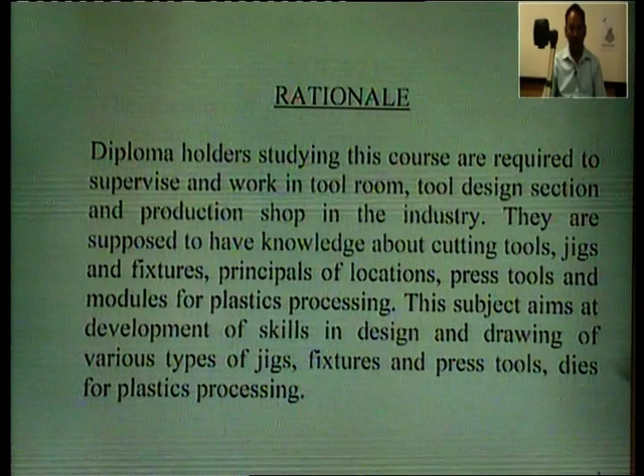Next topic is locating. So what is locating? The question of properly locating, supporting and clamping the work is important since the overall accuracy is dependent primarily on the accuracy with which the workpiece is consistently located within the jigs or fixture. There must be no movement of the work during the machining. Locating refers to the establishment of a proper relationship between the workpiece and the jigs or fixture.

The function of clamping is to exert a force to press the workpiece against the locating surfaces and hold it there against the action of cutting forces.

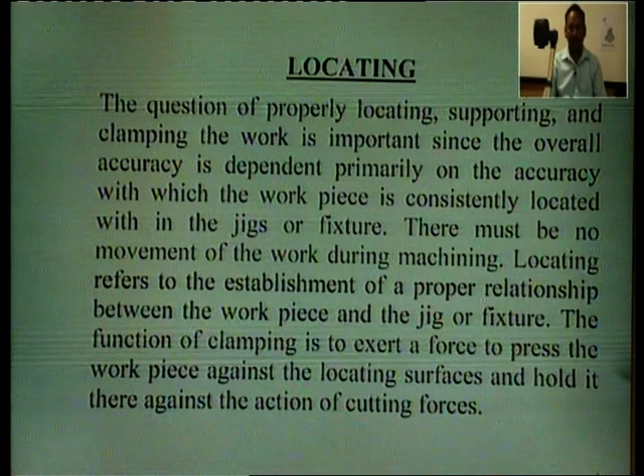Basic principles of location. Locating and clamping are critical functions of any work holder. To perform properly, work holders must accurately and consistently position the workpiece relative to the cutting tools, part after part. To accomplish this, the locators must ensure that the workpiece is properly referenced and the process is repeatable.

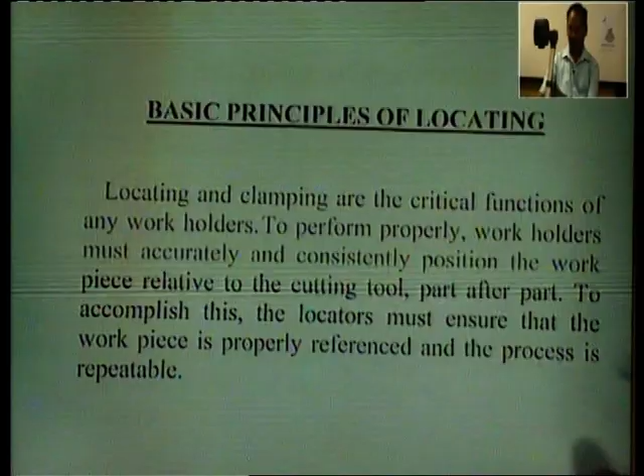Referencing and repeatability. Referencing is a dual process of positioning the workpiece relative to the work holders and the work holder relative to the cutting tools. Referencing the work holder to the cutting tool is performed by the guiding or setting devices. With drill jigs, referencing is accomplished using drill bushings. With fixtures, referencing is accomplished by using fixture keys, feeler gauges and or probes.

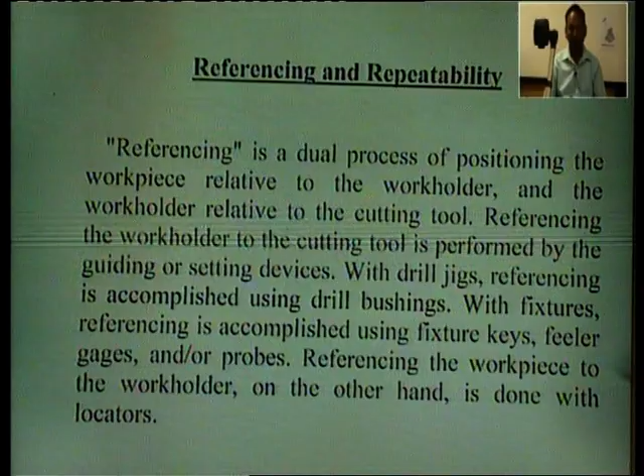Referencing the workpiece to the work holder, on the other hand, is done with the locators. If a part is incorrectly placed in a work holder, the proper location of the workpiece is not achieved and the part will be machined incorrectly.

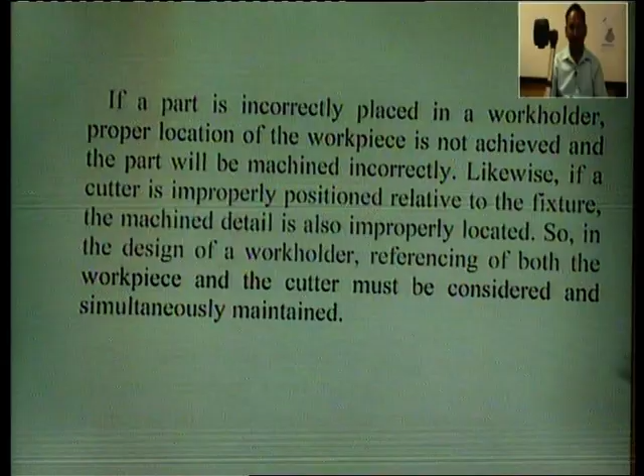To avoid this, likewise, if a cutter is improperly positioned relative to the fixture, the machined detail is also improperly located. So in the design of a work holder, referencing of both the workpiece and the cutter must be considered and simultaneously maintained.

Repeatability is the ability of a work holder to consistently produce parts within tolerance limits, and is directly related to the referencing capability of the tool. The referencing of the cutter must be consistent if the jigs or fixture is to maintain desired repeatability.

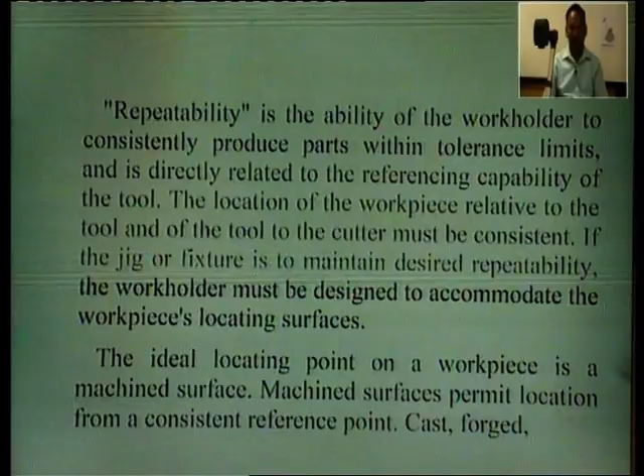The work holder must be designed to accommodate the workpiece locating surfaces. The ideal locating points on a workpiece is a machined surface. A machined surface permits location from a consistent reference point. For example, cast, forged, sheared or sawed surfaces can vary greatly from part to part and will affect the accuracy of the location.

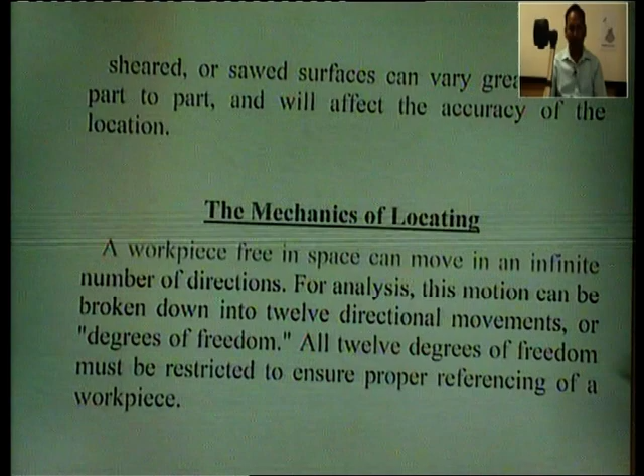The mechanics of locating: a workpiece free in space can move in an infinite number of directions. For analysis, this motion can be broken down into 12 directional movements, or we can say 12 degrees of freedom. All 12 degrees of freedom must be restricted to ensure proper referencing of a workpiece.

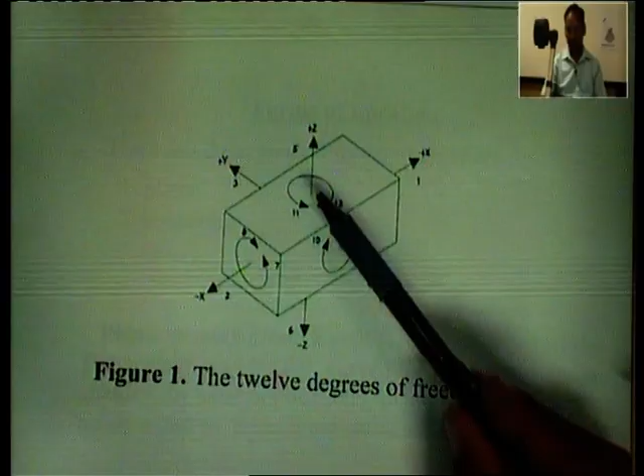The axial degrees of freedom permit straight line movement in both directions along the 3 principal axes shown as x, y and z. Here we can show this is the x axis, this is the y axis and this is the z axis. The radial degrees of freedom permit rotational movements along x, y and z axis in both clockwise and counterclockwise radial directions around the same 3 axes.

The devices that restrict a workpiece movement are the locators. The locators must be strong enough to maintain the position of the workpiece and to resist the cutting forces. This fact also points out a crucial element in work holder design, that is, locators, not clamps, must hold the workpiece against the cutting forces.

Locators provide a positive stop for the workpiece placed against the stop. The workpiece cannot move. Clamps, on the other hand, rely only upon the friction between the clamp and the clamped surface to hold the workpiece. Sufficient forces could move the workpiece. Clamps are only intended to hold the workpiece against the locators.

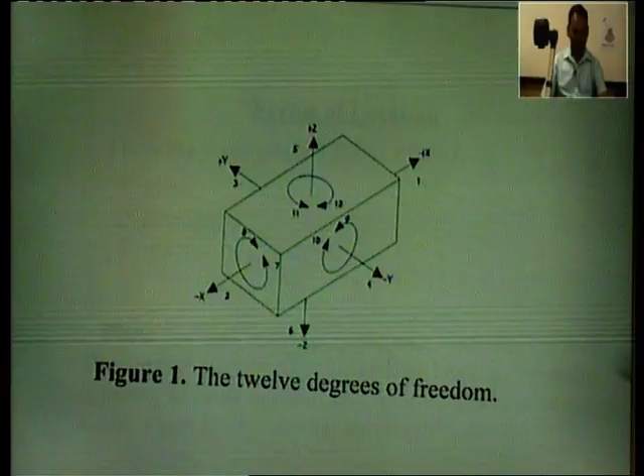Forms of locations. There are generally 3 forms of locations. Number 1 is plane, number 2 is concentric and number 3 is radial. Plane locators locate a workpiece from any surface. The surface may be flat, curved or have an irregular contour. In most applications, plane locating devices locate a part by its external surface.

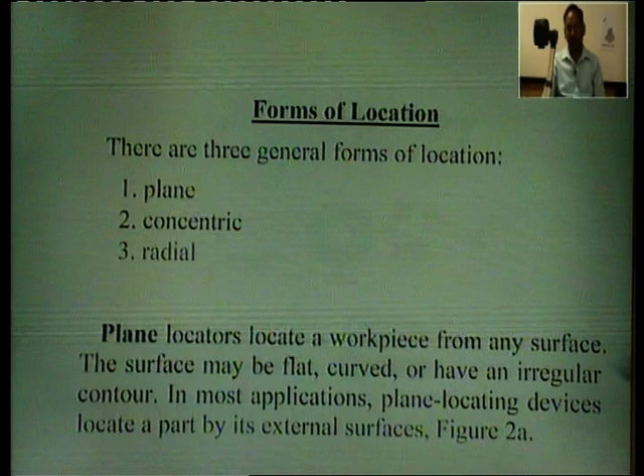For example, as we see in figure 2a, this shows the plane locator. Similarly, figure 2b shows the concentric locator. For the most part, this locates a workpiece from a central axis. This axis may or may not be in the center of the workpiece.

The most common type of concentric location is a locating pin placed in a hole. Here we can see this is a locating pin placed in a hole. Some workpieces, however, might have a cylindrical projection that requires a locating hole in the fixture. As shown in figure 2b, the third type of location is the radial location, shown in figure 2c. These radial locators restrict the movement of a workpiece around a concentric locator.

In many cases, locating is performed by a combination of the three locational methods. Locating from external surfaces: flat surfaces are common workpiece features used for location. Locating from a flat surface is a form of plane location. Supports are the principal devices used for this location. The three major forms of supports are solid, adjustable and equalizing, as shown in the next figure.

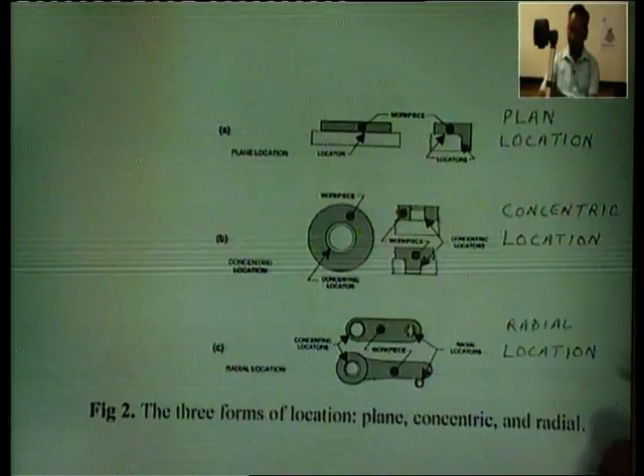So here in this figure we can see that solid, adjustable and equalizing supports locate a workpiece from a flat surface. In the solid case, solid supports are fixed height locators. They precisely locate a surface in one axis. Though solid supports may be machined directly into a tool body, a more economical method is using installed supports such as rest buttons.

Similarly, the adjustable supports are variable height locators. In this figure we can see the adjustable supports given in this diagram. Like solid supports, they also precisely locate a surface in one axis. These supports are used where workpiece variations require adjustable supports to suit different heights, mainly for cast or forged workpieces that have uneven or irregular mounting surfaces.

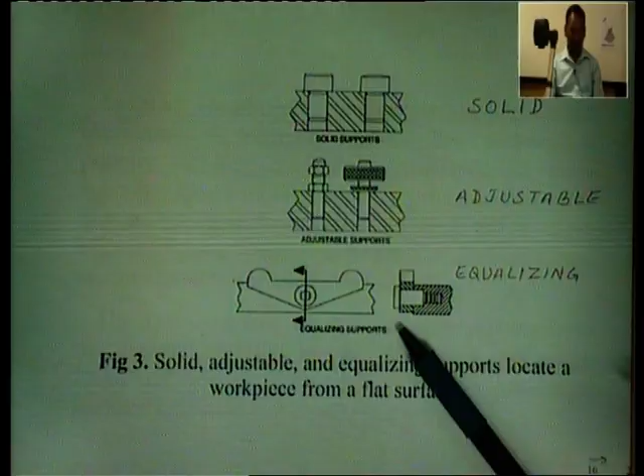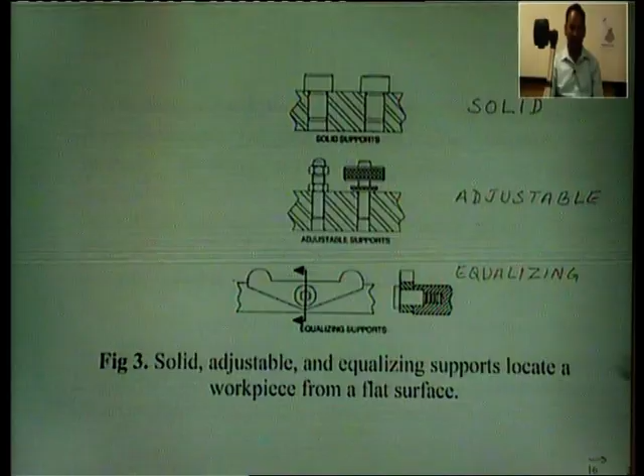Similarly, in equalizing supports, this figure shows the equalizing support. These are a form of adjustable supports used when a compensating support is required. Although these supports can be fixed or positioned, in most cases equalizing supports float to accommodate workpiece variations. As one side of the equalizing support is depressed, the other side raises the same amount to maintain part contact. In most cases, adjustable and equalizing supports are used along with the solid supports as shown in the top figures.

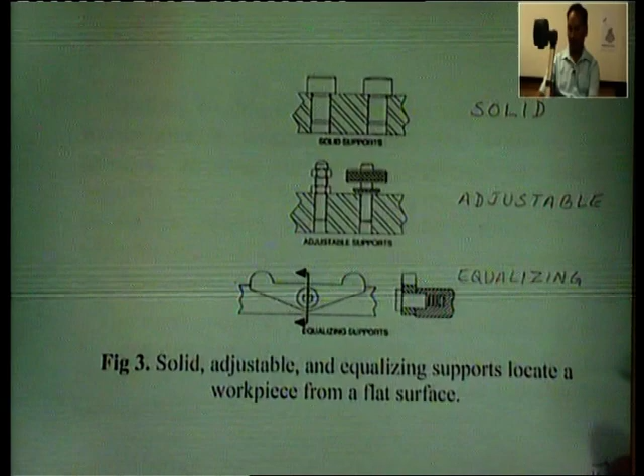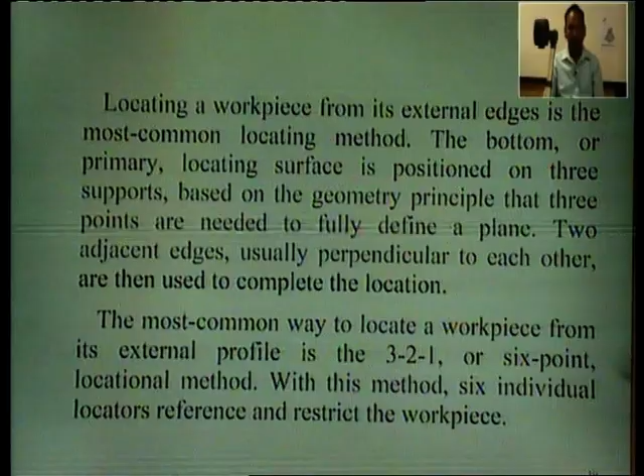Locating a workpiece from its external edge is the most common locating method. The bottom or primary locating surface is positioned on three supports based on the geometrical principle that 3 points are needed to fully define a plane. Two adjacent edges, usually perpendicular to each other, are then used to complete the location. The most common way to locate a workpiece from its external profile is the 3-2-1 or 6-point location method. With this method, 6 individual locators reference and restrict the workpiece.

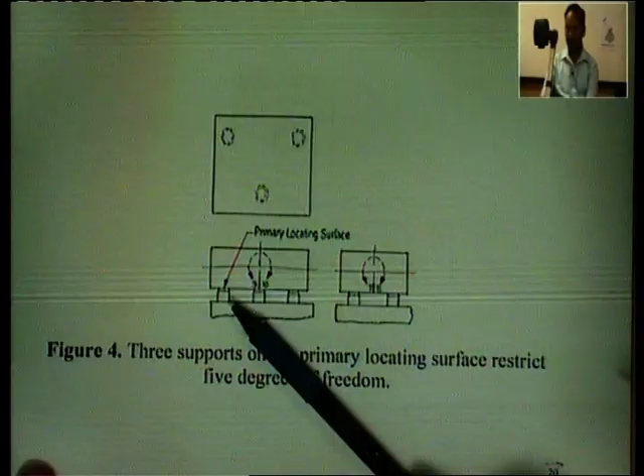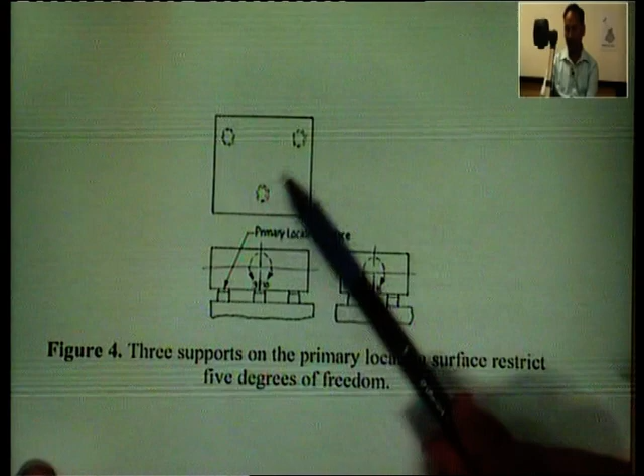In this figure, 3 supports on the primary locating surface restrict 5 degrees of freedom. Here we can see the primary locating surface and the 3 spots given, shown in the top view of this figure. So how can we restrict the 5 degrees of freedom?

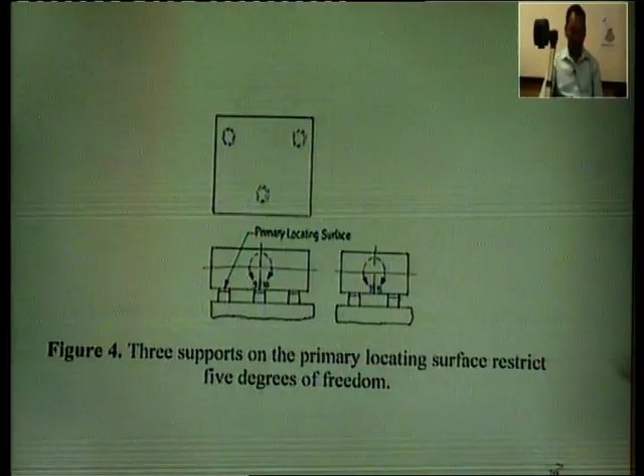As shown in this figure, 3 locators or spots are placed under the workpiece, usually positioned on the primary locating surface. This restricts axial movement downward along the z axis, that is location 6, and radially about the x axis, locations 7 and 8, and about the y axis, locations 9 and 10. Together the 3 locators restrict 5 degrees of freedom.

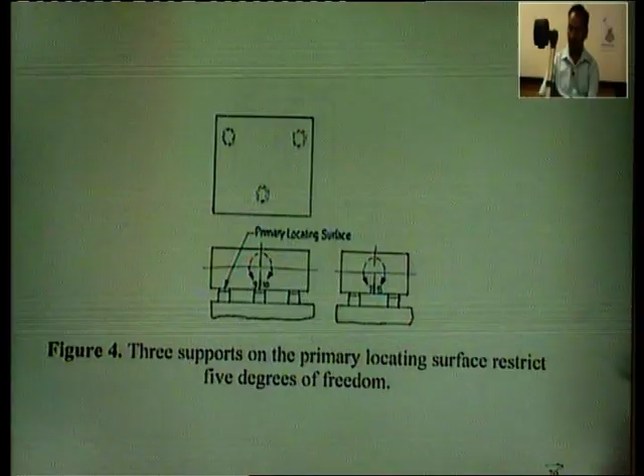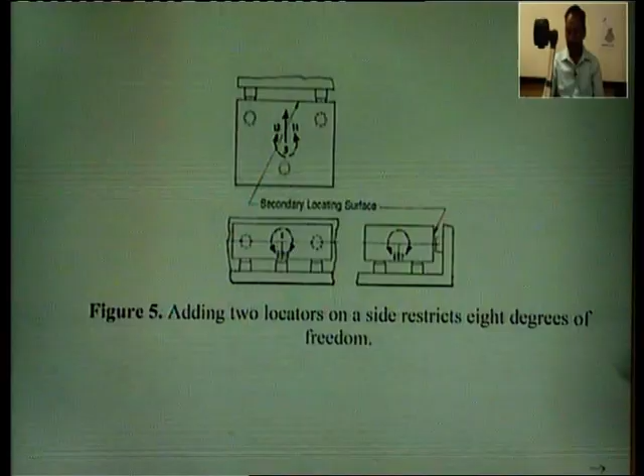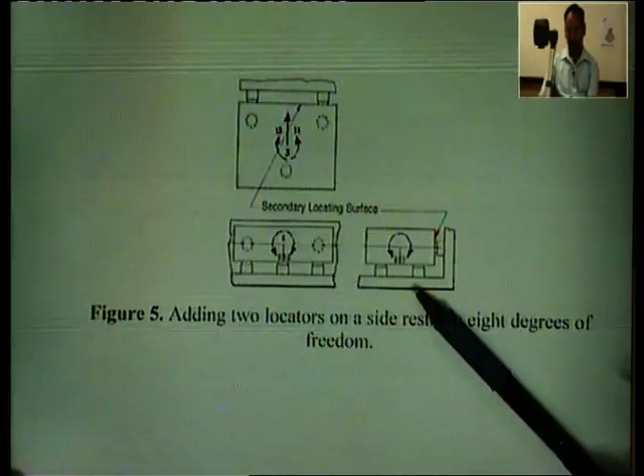Here, by adding 2 more locators on a side, we restrict a total of 8 degrees of freedom. These additional 2 locators are placed along with the already existing 3 locators, normally on the secondary locating surfaces as shown in this figure. They restrict an additional 3 degrees of freedom by arresting axial movement along the plus y axis and radial movement about the z axis. These two are movements 11 and 12.

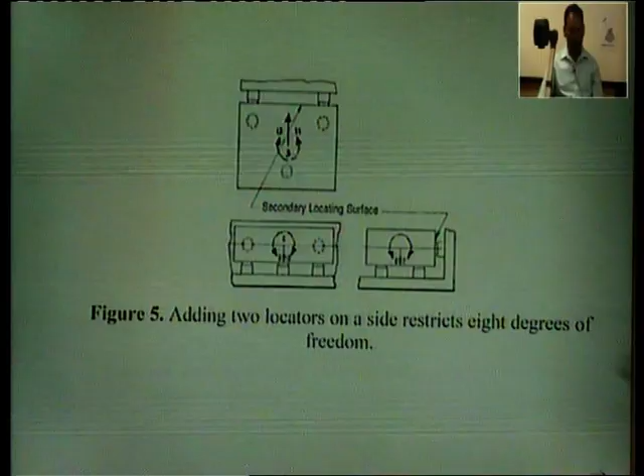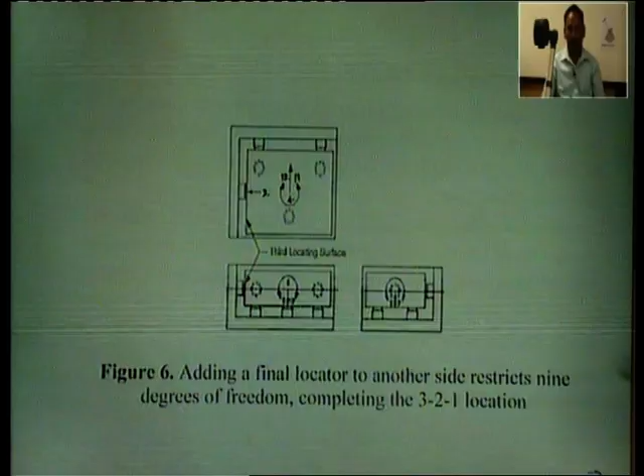Similarly, in this figure, adding a final locator to another side restricts 9 degrees of freedom, completing the 3-2-1 location process. These are the 3 locators already placed inside the workpiece, these are the 2 locators placed on the side, and this is the additional locator placed which completes this 3-2-1 location process.

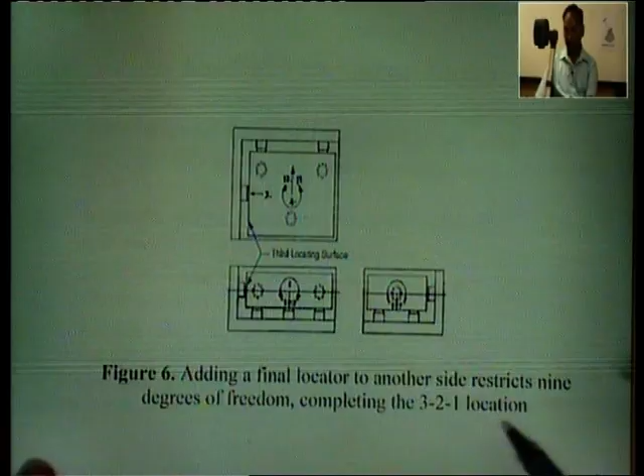The final locator, as shown in this figure, is positioned at the end of the part. It restricts axial movement in one direction along the minus x axis. Together, these 6 locators restrict a total of 9 degrees of freedom. The remaining 3 degrees of freedom, numbers 1, 4 and 5, will be restricted by the clamps.

Although cylindrical rest buttons are the most common way of locating a workpiece from its external profile, there are also other devices used for this purpose. These devices include flat-sided locators, V locators, nest locators and adjustable locators.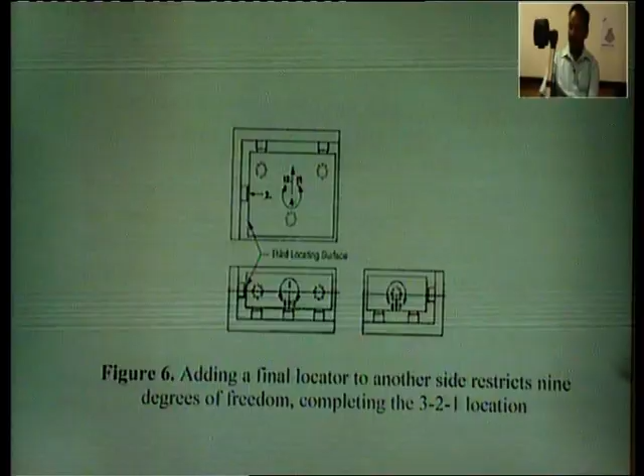Locating from internal surfaces: locating a workpiece from an internal diameter is the most efficient form of location. The primary features used for this form of location are individual holes or hole patterns. Depending on the placement of the locators, either concentric, radial, or both concentric and radial locations are accomplished when locating an internal diameter. Plane location is also provided by the plate used to mount the locators. The two forms of locators used for internal locations are locating pins and locating plugs. The only difference between these locators is their size - locating pins are used for smaller holes and locating plugs are used for larger holes.

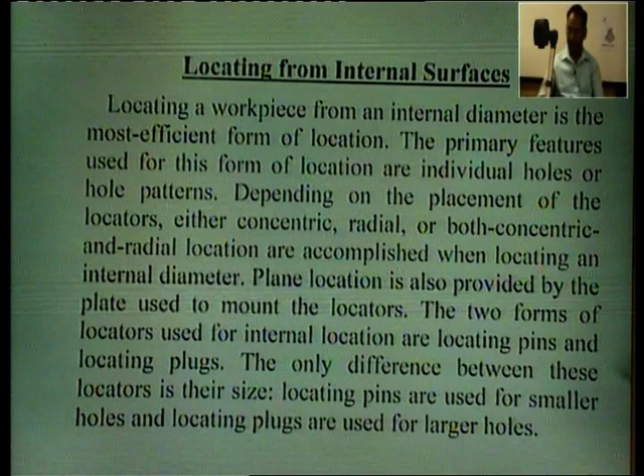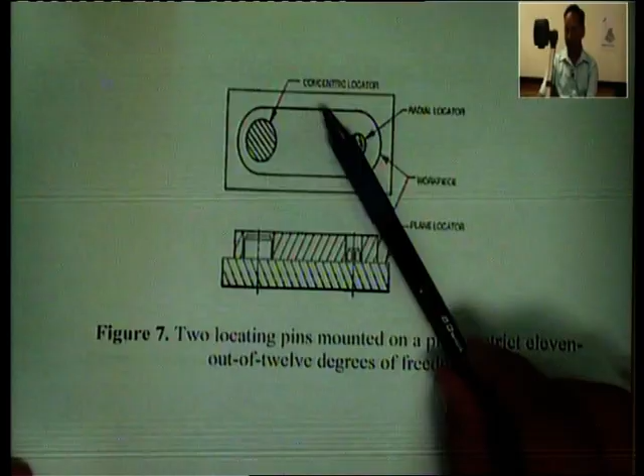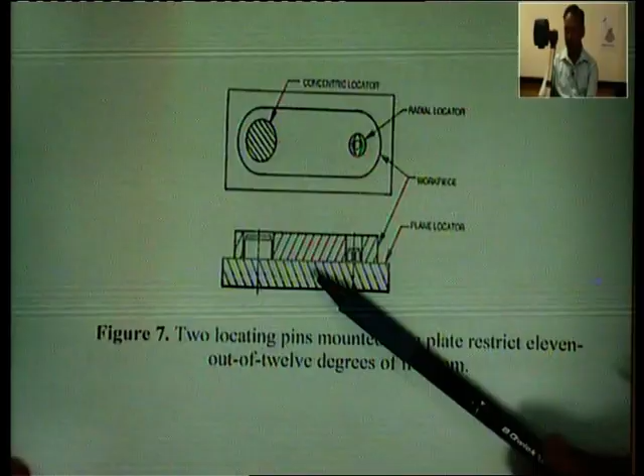Here in this figure, two locating pins mounted on a plate restrict 11 out of 12 degrees of freedom. As we can see, this is the concentric locator, this is the radial locator, and this is the workpiece where these two locators are placed. This is the front view of this arrangement, with the plane locators placed inside this job.

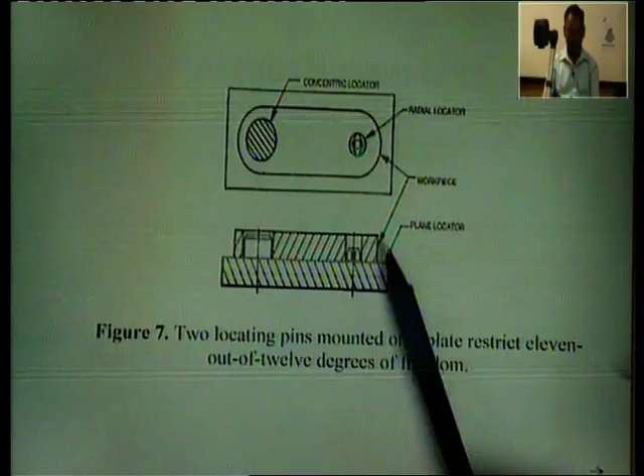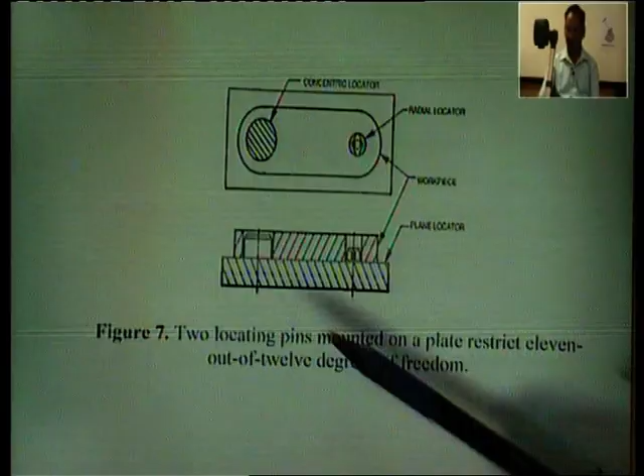As shown in this figure, the plate under the workpiece restricts 1 degree of freedom. Here we can see the plate and the workpiece - it prevents any axial movement downward along the minus z axis. The center pin, acting in conjunction with the plate as a concentric locator, prevents any axial or radial movement along the x and y axis. Together these two locators restrict 9 degrees of freedom.

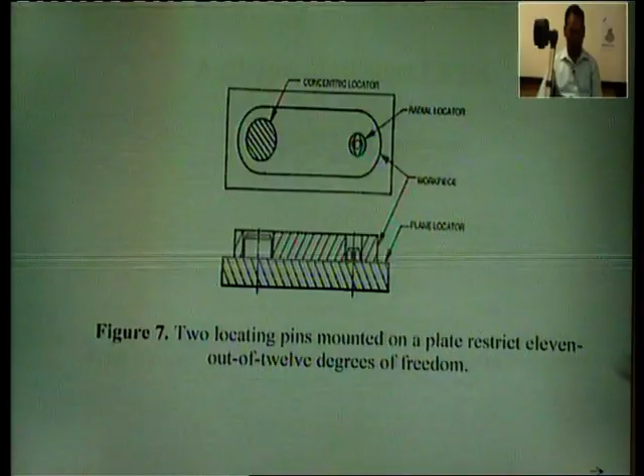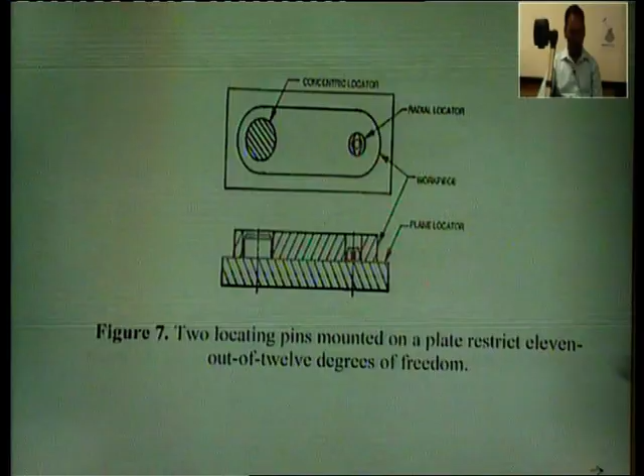The final locator, the pin in the outer hole, is the radial locator. In this figure, this radial locator restricts 2 degrees of freedom by arresting the radial movement around the z axis. So together the locators restrict 11 out of all 12 degrees of freedom. The last degree of freedom, the 12th, in the plus z direction, will be restricted with the help of a clamp - this is the plus z direction, the upward side.

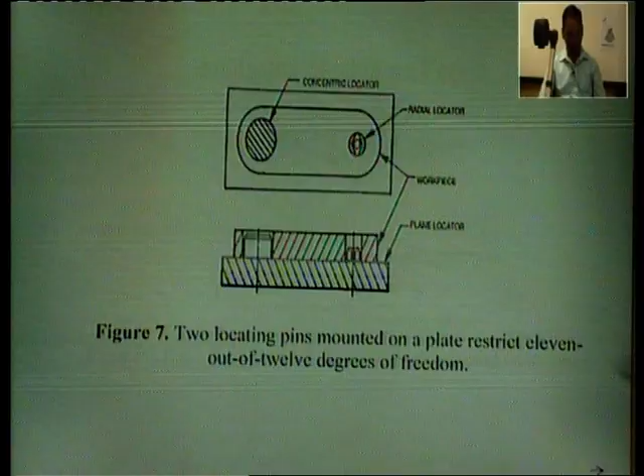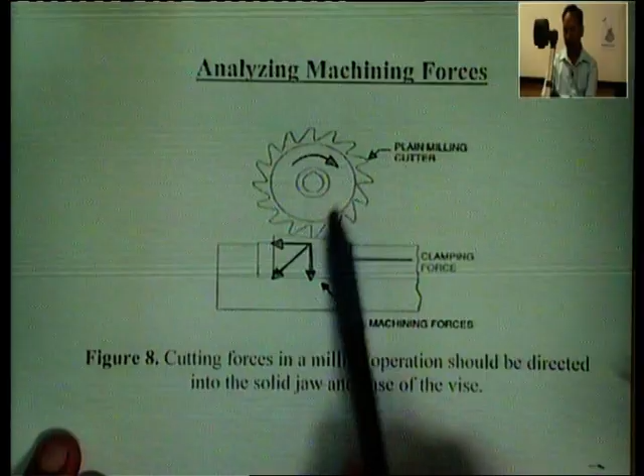Analyzing machining force, here in this figure we can see that cutting forces in a milling operation should be directed into the solid jaw and the base of the vise. This is the direction of the machining force applied during this process, this is the clamping force, and this is the rotating direction of this milling cutter, a plain milling cutter.

The most important factor to consider in fixture layout is the direction and magnitude of machining forces exerted during the operation. As shown in this figure, the milling force generated on the workpiece when properly clamped in a vise tends to push the workpiece downward and towards the solid jaw. This is the downward direction and this is the direction toward the solid jaw. The clamping force of the movable jaw holds the workpiece against the solid jaw and maintains the position of the part during the cut.

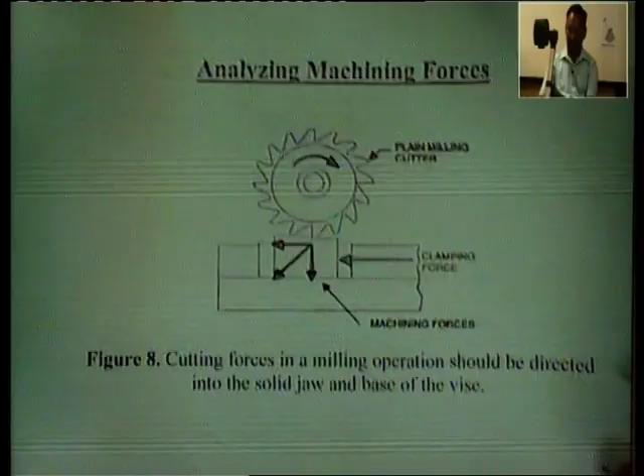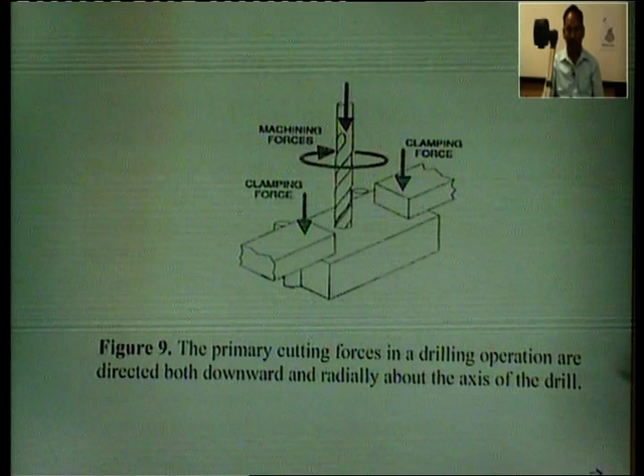Here in this figure, the primary cutting forces in a drilling operation are directed both downward and radially about the axis of the drill. This is the workpiece, these are the clamps provided, this is the direction of clamping force applied, and this is the tool, and this is the direction of machining force applied on this work.

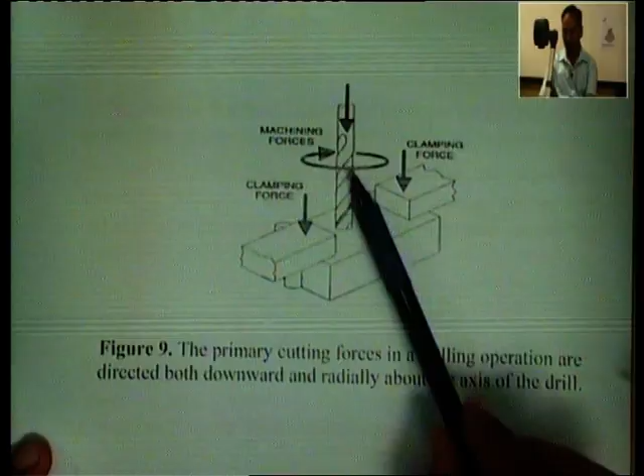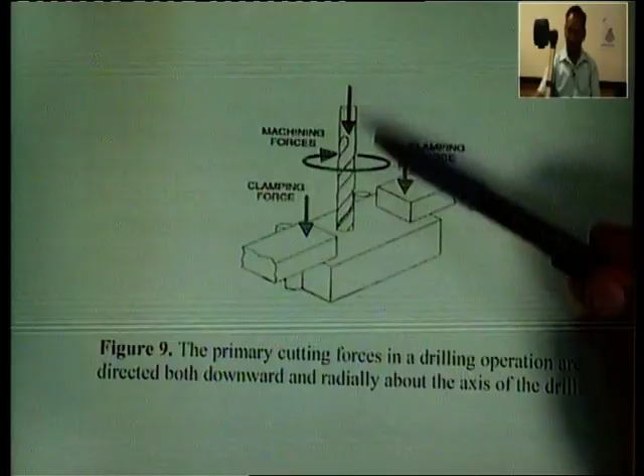Another example of cutting forces on a workpiece can be seen in this drilling operation figure. The primary machining force tends to push the workpiece down into the work holder support, this being the downward direction. An additional machining force acting radially around the drill axis also forces the workpiece into the locators. The clamps that hold this workpiece are intended only to hold the workpiece against the locators and to maintain its position during the machining cycle.

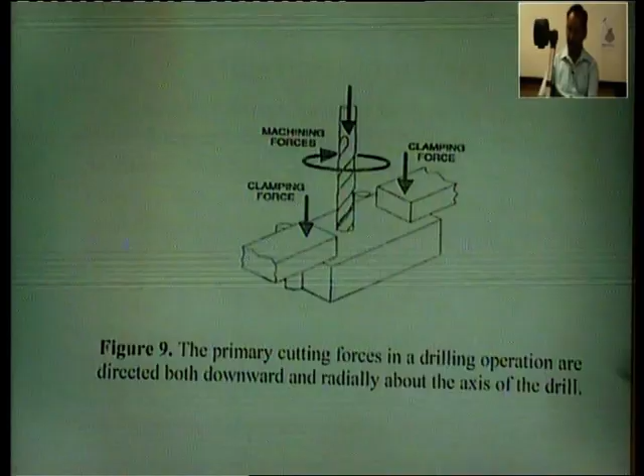Locating guidelines - how can we locate a workpiece. No single form of location or type of locator will work for every work holder. To properly perform the necessary locations, each locator must be carefully planned into the design. The following are a few guidelines to observe in choosing and applying locators.

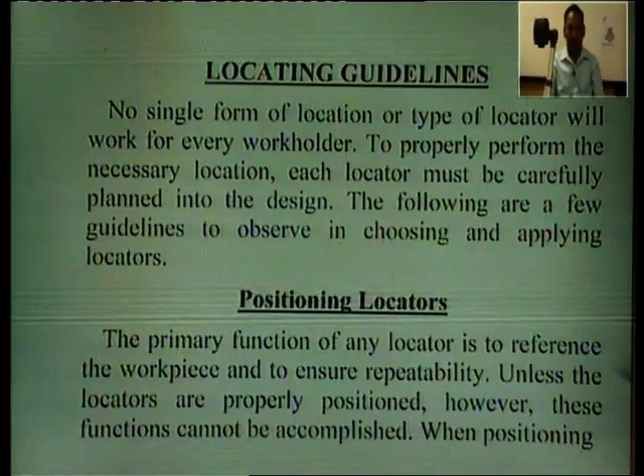Positioning locators: the primary function of any locator used during a process is to reference the workpiece and ensure repeatability. Unless the locators are properly positioned, however, these functions cannot be accomplished. Locators should be positioned both relative to the work holder and to the workpiece.

There are a few basic points to keep in mind. Whenever practical, position the locators so they contact the workpiece on a machined surface. The machined surface not only provides repeatability, but usually offers a more stable form of location. The workpiece itself determines the area of machined surface used for location. In some instances the entire surface may be machined, in others, especially with castings, only selected areas are machined.

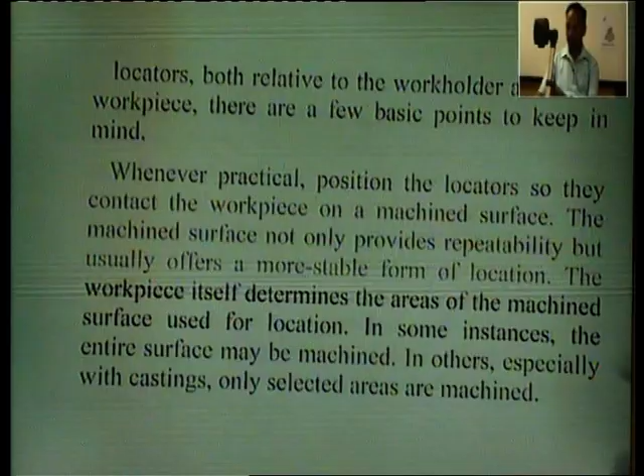The best machined surface to use for location, when available, are machined holes. As previously noted, machined holes often offer the most complete location with a minimum number of locators. The next configuration that affords adequate repeatability is two machined surfaces forming a right angle. These characteristics are well suited for the 6-point locational method, regardless of the type or condition of the surfaces used for location. However, the primary requirement in the selection of a locating surface is repeatability.

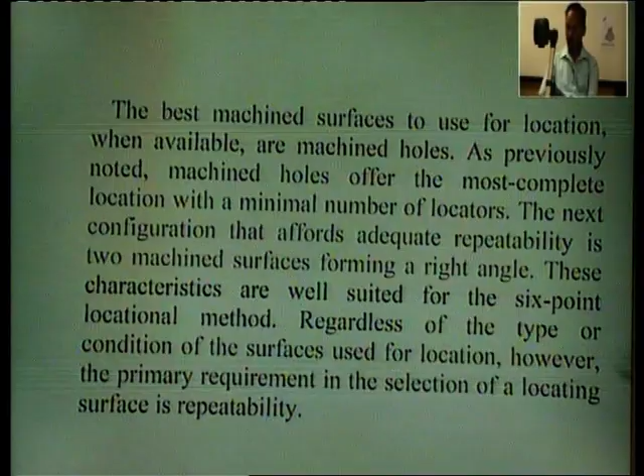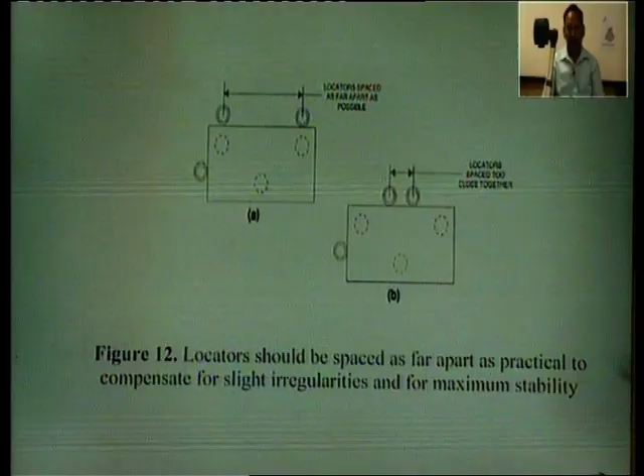Here in this figure, locators should be spaced as far apart as practical to compensate for slight irregularities and for maximum stability. So here in this...